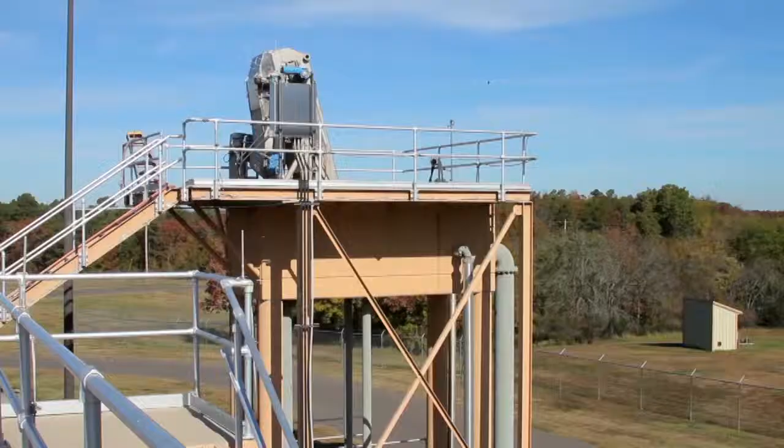Decades of design show that in most towns, wastewater lines are routed along creeks since they have a natural gravity fall. Wastewater treatment plants were often positioned at low points in the system for easier collection and treatment.

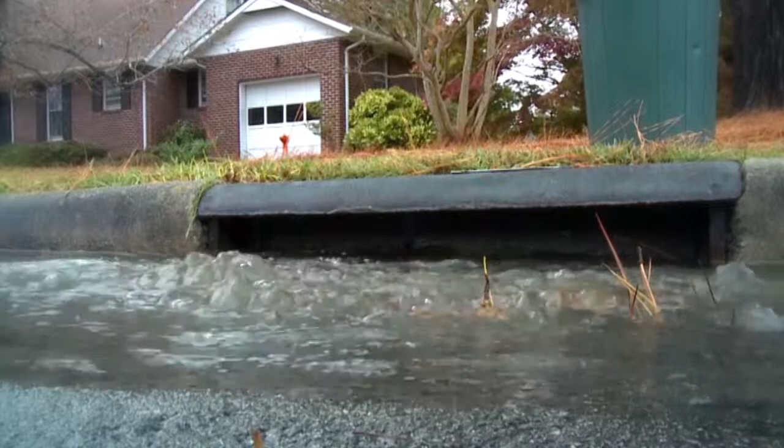Wastewater lines follow watersheds, and wastewater overflows, if allowed to continue unabated, can enter our creeks and streams, eventually ending up in our lakes. In 2008, the Arkansas Department of Environmental Quality issued Hot Springs a Consent Administrative Order, or CAO,

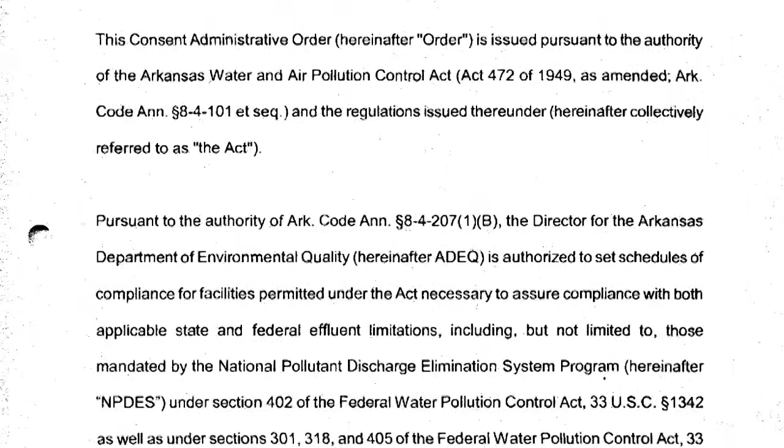requiring that the city address dry weather wastewater system overflows by January 2011 and wet weather overflows by January 2018. In dry weather, these overflows occur within the system as a result of pump station mechanical or power failure.

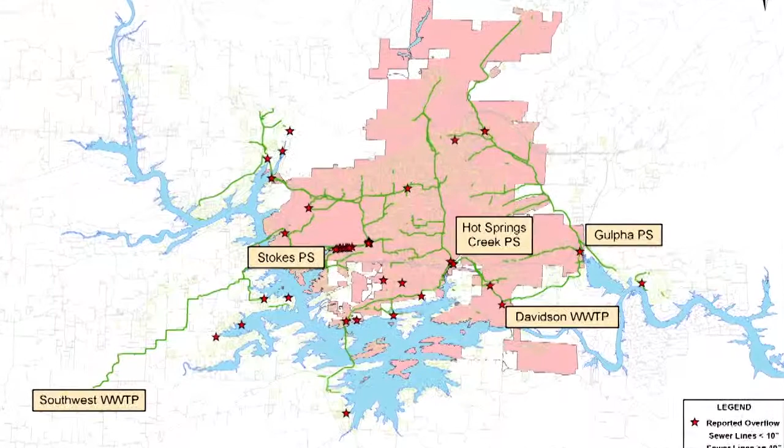In wet weather, heavy rainfall events can exceed the capacity of the pipelines and pump stations. Although it is not uncommon for cities to receive a CAO for wastewater violations, addressing and correcting these deficiencies often places great challenges upon local governments and their ratepayers.

The big question is, how do we prevent overflows from impacting our pristine lakes? The city of Hot Springs is about halfway through implementing a 10-year improvement plan that utilizes 5 key elements: professional experience, good engineering practices, system evaluation and analysis, cutting-edge technology, and open communication with regulatory agencies.

Let's take a look at the basics of our city's wastewater system. We'll follow with a progress report on the 10-year improvement plan and look ahead to future needs as we continue to meet the requirements of the CAO.

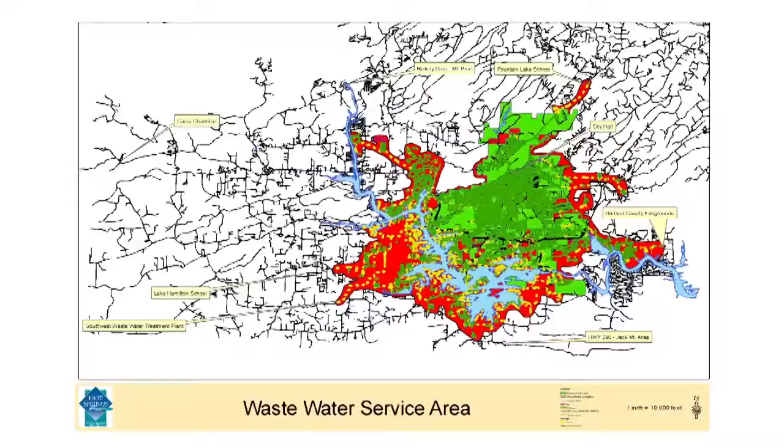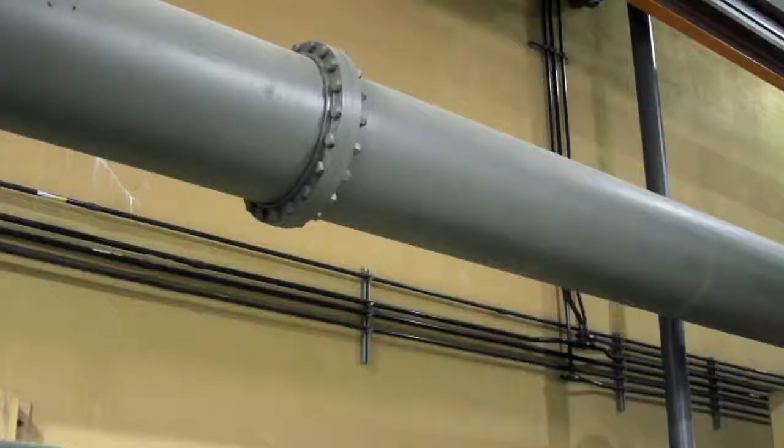The Hot Springs Regional Wastewater Treatment Plant collects, treats, and transports wastewater for more than 23,000 customers. Hot Springs Utilities serves not only the citizens of Hot Springs, but also large unincorporated areas of Garland County. A network of approximately 600 miles of wastewater lines collects from service areas in both city and county.

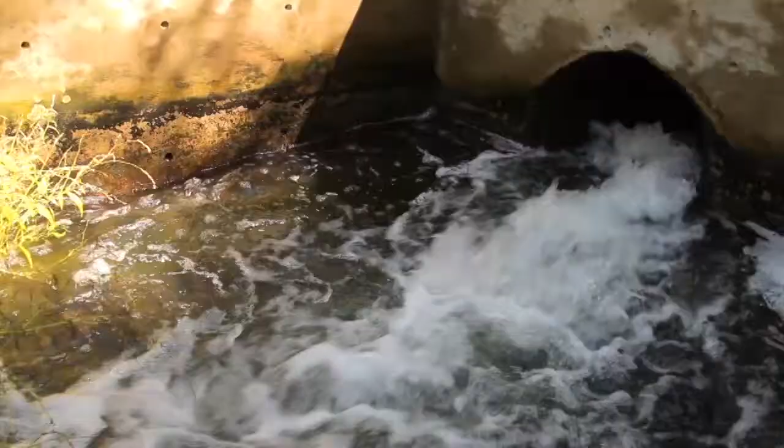Because of the hilly nature of lake terrain, more than 200 mid to major pump stations and 3,200 grinder pump stations transport the wastewater to the treatment plant, where it is treated and then discharged into Lake Catherine.

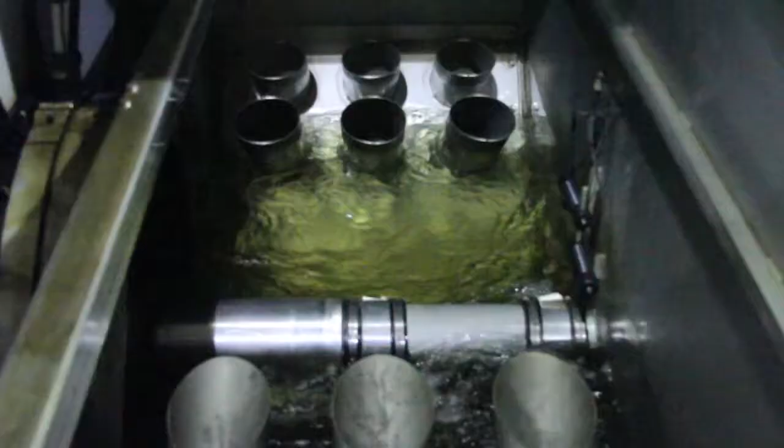The Southwest Wastewater Treatment Plant, placed into service in 2008, was intentionally designed and strategically located to treat wastewater from the southwest portion of Hot Springs service area. It is constructed to treat approximately 1 million gallons of wastewater daily, with the capability to be expanded to treat up to 3 million gallons per day.

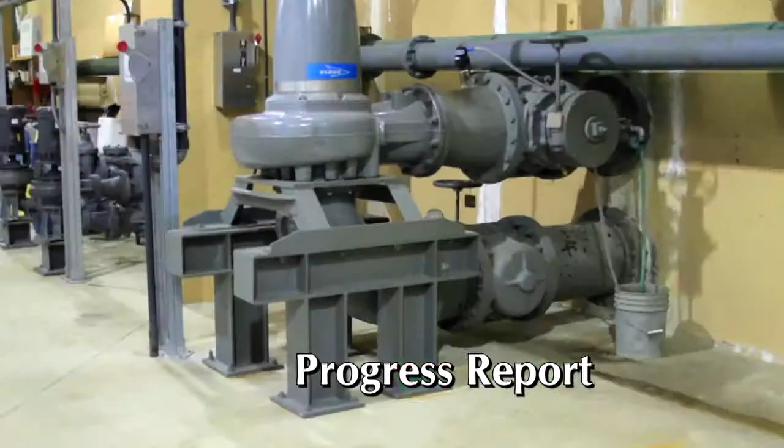Now that we're at the halfway mark of our 10-year plan for wastewater improvements, it's time for a progress report on the 5 key elements of that plan.

The city employed a planning team of specialists, including RJN Group, Brown Engineers, Garver Engineers, and Engineers Inc., who collaborated with city staff. Together, the team created a thoughtful, defensible strategy using good engineering practices while minimizing expenditures. Their decisions took environmental, economic, and sustainability issues into account.

This meant taking a pragmatic look into the future with the goal of mitigating similar problems 50 years from now. In late 2009, the city issued $26 million in wastewater improvement bonds, supported by wastewater rates that would fund improvement projects identified by the planning team.

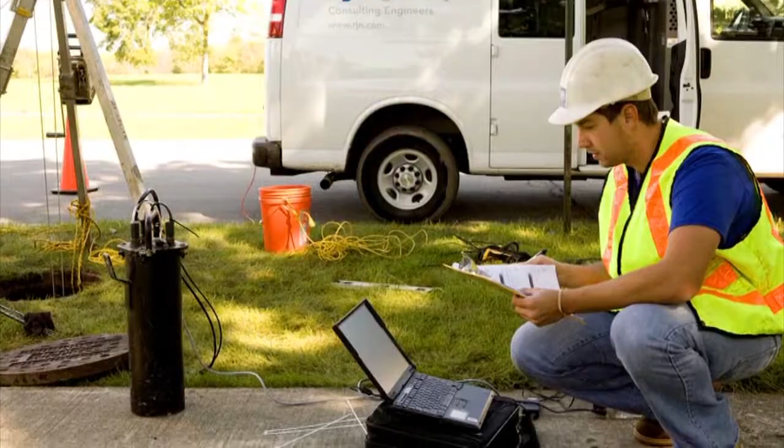Using more than 60 flow monitoring devices placed in the system over an extended time period, problem areas were identified and prioritized. A comprehensive evaluation of manholes, pipelines, and pump stations was completed, yielding data which was used to develop subsequent projects.

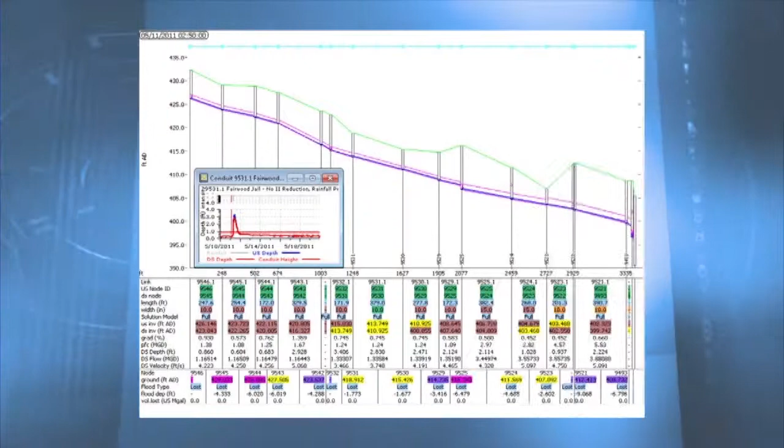The city employed cutting-edge technology in the development of a hydraulic model of the entire wastewater system that not only simulates existing wastewater flows but predicts the impact of additional flows related to future growth. This model, considered one of the most complex and advanced models worldwide, has already been utilized to ensure that the city's wastewater system can handle projects such as the new jail facility.

In addition, the model was used to confirm available capacity of an existing pump station near a new 300-apartment complex located on South Rogers Road.

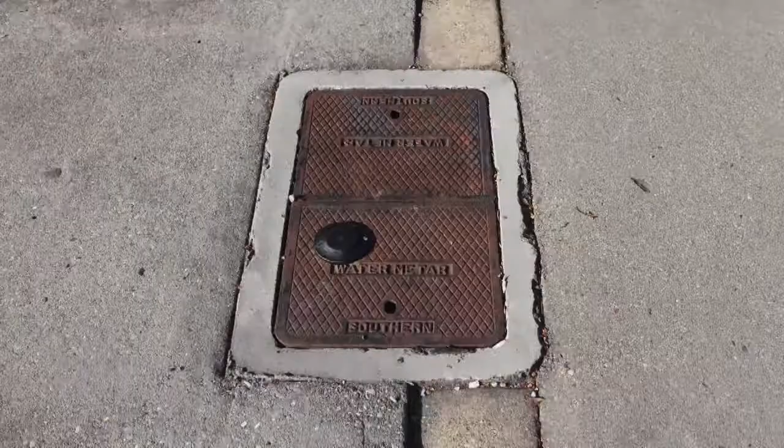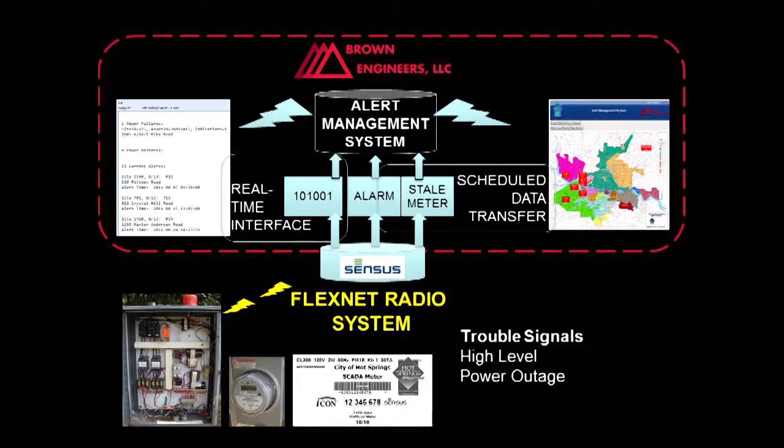The city also leveraged its automated metering infrastructure, AMI system, initially used to automate water meter monitoring, to also monitor wastewater lift stations. During a project planning meeting, the idea emerged that the same technology might benefit the wastewater system as well. Currently, the city is working to utilize the same high-tech backbone for yet another application: supervisory control and data acquisition from the city's water tanks and water and wastewater pump stations.

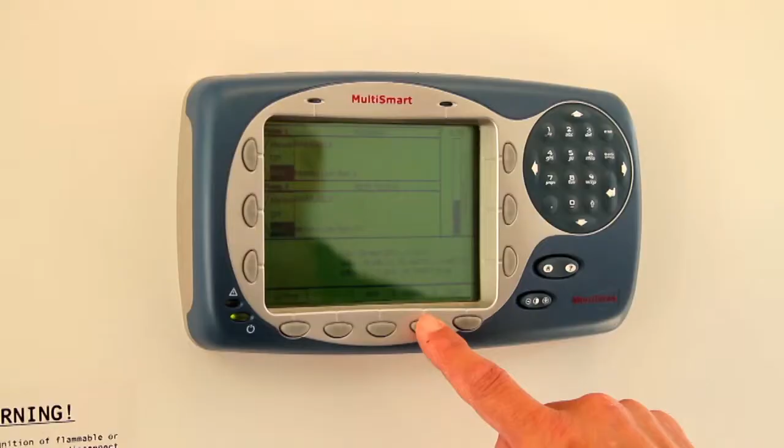Funding for the initial AMI system was innovative in itself, utilizing federal stimulus funds and low-interest state loans for green infrastructure projects. Utilizing the existing AMI system infrastructure for additional telemetry projects has saved you, the ratepayer, between $30 and $40 million. While these mandated improvement projects all have price tags, they also reap significant cost savings in terms of reduced fleet and personnel costs, as well as increased revenues from more accurate meter readings.

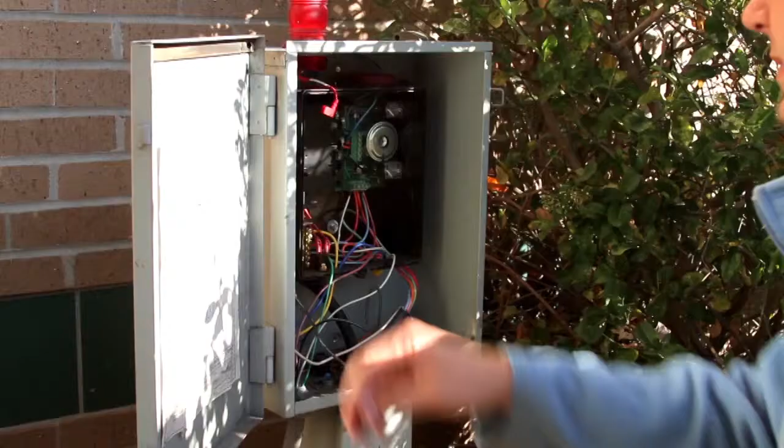Other benefits include quicker problem resolution when a customer's issue can be addressed with a phone and a computer versus sending a truck and employee on site, reducing our carbon footprint and improving overall customer service and system management. In the long term, faster repairs and improved system maintenance practices also help lower operational costs.

From the outset, the team fostered open and ongoing communication with EPA, ADEQ, Department of Health, and other regulatory agencies. Frequent updates, review, and consultation with these agencies helped the city ensure a viable plan. This approach resulted in subsequent recognition by EPA as not only making significant progress in meeting the requirements of the CAO, but also as an industry leader in the use of technology to address those requirements.

As a result of its innovative, out-of-the-box approach to meeting the requirements of the CAO, the City of Hot Springs has received local, state, and even national recognition. Having transitioned from archaic practices to innovative applications, city staff is now asked to present at conferences, sharing lessons learned with others.

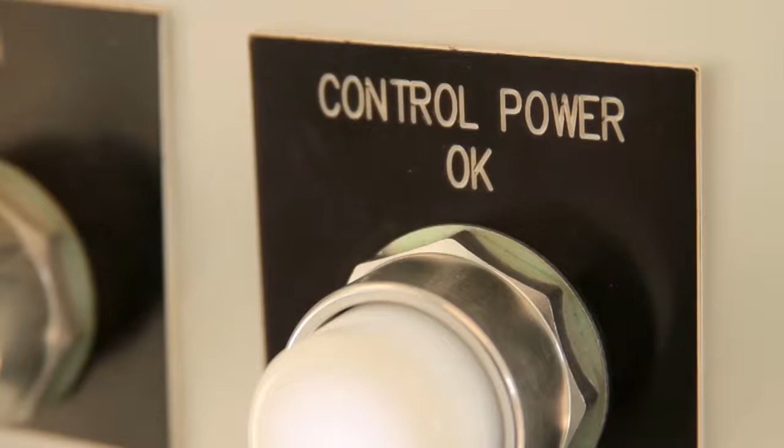Account growth and prudent budget management have enabled the city to support the last 4 years of wastewater improvement projects without any changes to the rate plan implemented in 2009.

A key component of that rate plan was the assumption that additional wastewater debt would be issued by 2015 in order to meet the city's ongoing needs for capital improvements to the wastewater system.

The city plans to issue about $43 million in 25-year wastewater revenue bonds at a net interest rate of 4.5% to support additional system improvements required to achieve compliance as mandated by the CAO.

The resulting impact to most residential ratepayers will be an additional $3 to $6 per month over the next 5 years, depending on the total debt issued. Any subsequent capital improvement needs will require additional adjustment to these annual scheduled rate increases.

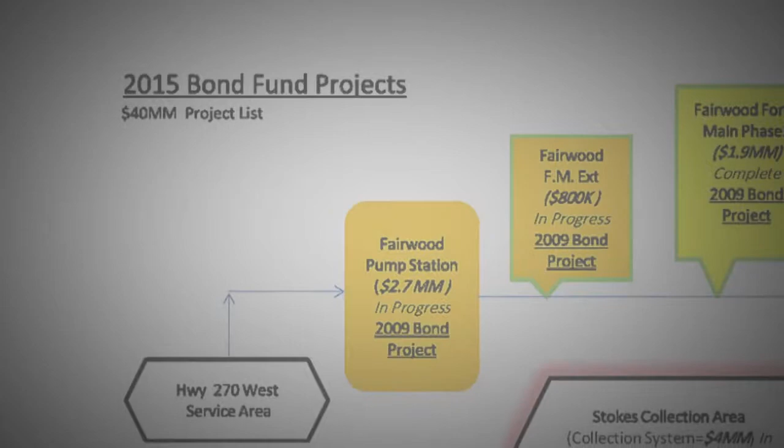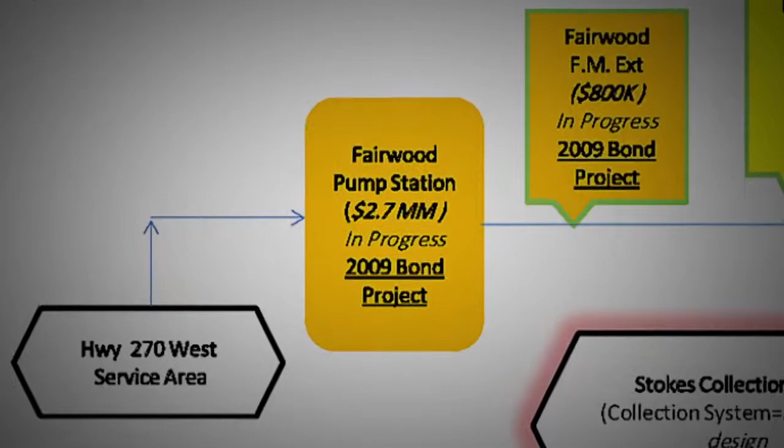Future wastewater system projects will include pump station and force main improvements, rehabilitation and replacement of pipelines and manholes, and wastewater plant improvements that will provide redundancy and increase operational efficiency.

The City of Hot Springs is committed to ensuring the health and safety needs of the public and complying with the Federal Clean Water Act by making continued improvements to its wastewater system.

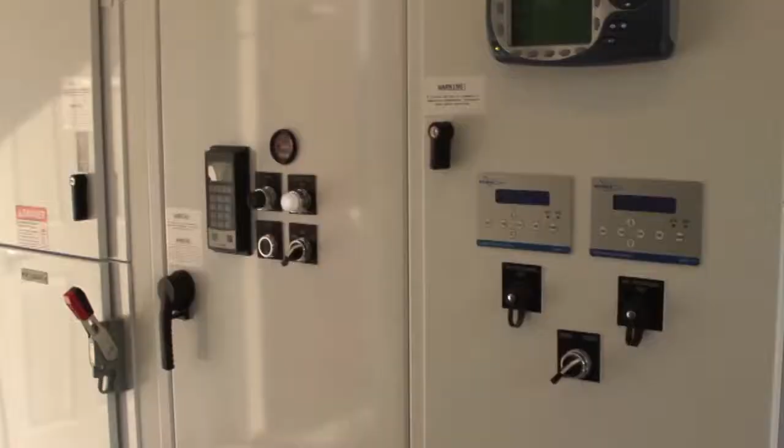Regular maintenance and updates are not only good management practices, but also help us set new standards for your wastewater system. Hot Springs has made giant strides in wastewater management in recent years, effectively utilizing ratepayer funds while fostering environmental stewardship, improved customer service, and technological advancement.

Staying on this path helps ensure an abundance of natural beauty and clean water that contribute to Hot Springs' quality of life for generations to come.